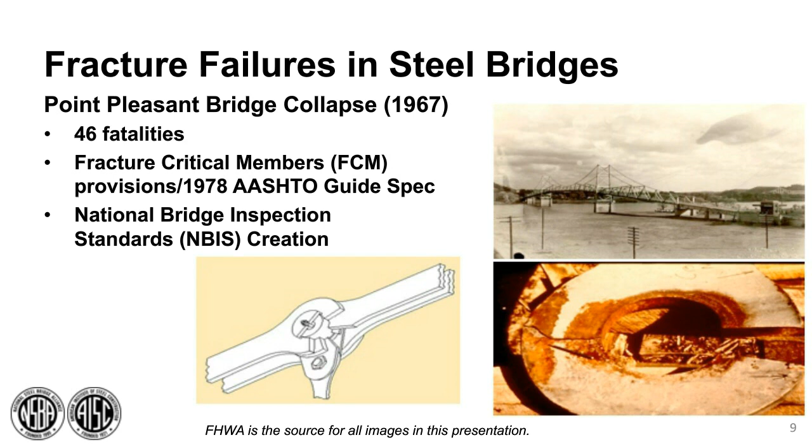Another fracture-induced failure was the Mianus River Bridge collapse in 1983. The two-girder bridge collapsed due to failure of the pin and hanger system in a suspended span. Since then, NBIS added the provision of hands-on inspection.

Hoan Bridge failure was another typical case. All three girders were found fractured due to constraint-induced fracture details. The fracture failure happened without warning, without the indication of fatigue crack growth. The failure happened at a highly constrained detail with high tensile stress and a crack-like condition. There are a number of other fracture failure cases in steel bridges. Fracture control is really necessary.

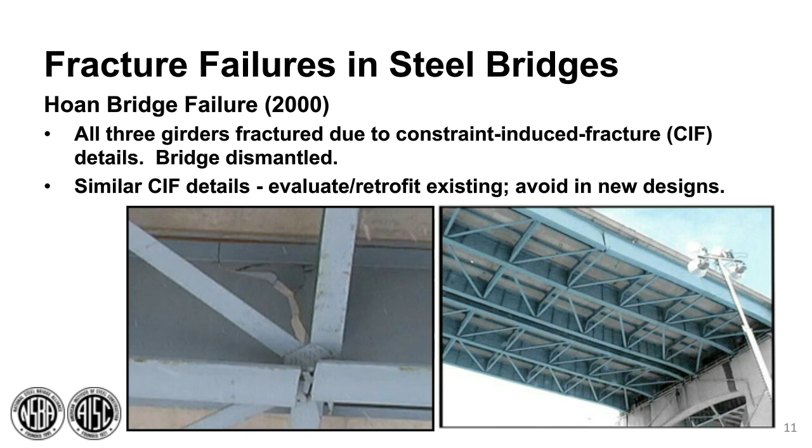The current fracture control practice in the US for steel bridges includes fabrication FCP, fracture control plan, with higher standard of steel toughness and fine grain, and also higher standard of shop fabrication, welding, and inspection. The first version of FCP is the 1978 AASHTO non-redundant FCM guide specifications, and the most current version is the AWS D1.5 Clause 12.

The second leg is the in-service inspection, in-depth and a more frequent hands-on FCM inspection at a 2-year interval. This is per National Bridge Inspection Standard, NBIS.

Beyond this 1 and 2, there is a design consideration beyond those two: contingency, continuity, and composite action. For example, for eyebar suspended spans like the Mianus River Bridge, in addition to more in-depth inspection, many efforts were made to make the span continuous or to add catcher systems at eyebar locations. Make details accessible - for example, we have no new designs using important details inaccessible to inspection, like the Point Pleasant Bridge. In fact, the sister bridge of the Point Pleasant Bridge was quickly dismantled as there is no way to detect similar problems. Also, avoid constraint-induced fracture details in new design. The CIF problem needs to be addressed more than FCP and inspection.

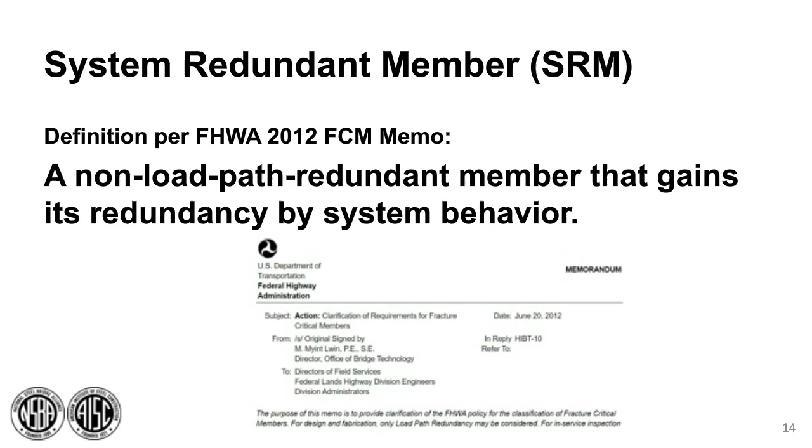Do we need to talk about the system redundancy of a four-girder bridge? No. The bridge has load path redundancy, so don't waste your time here. Per Federal Highway's 2012 FCM memo, SRMs are not FCMs, do not need FCM inspection, as the failure would not cause the bridge to collapse.

Also per that memo, to demonstrate SRMs, a state must submit through the division office of FHWA detailed analysis and evaluation criteria. Once reviewed, these criteria can be employed by the state systematically on their inventory.

I want to mention, if using today's good guidance language, this memo could have used the term 'should' instead of 'must.' However, there's no change to the clearly defined process.

For a type of member without load path redundancy, the SRM determination should follow an FHWA accepted procedure, which may be done in several possible ways: either through analysis, or without analysis by satisfying a list of conditions, or by comparison with previously determined SRMs.

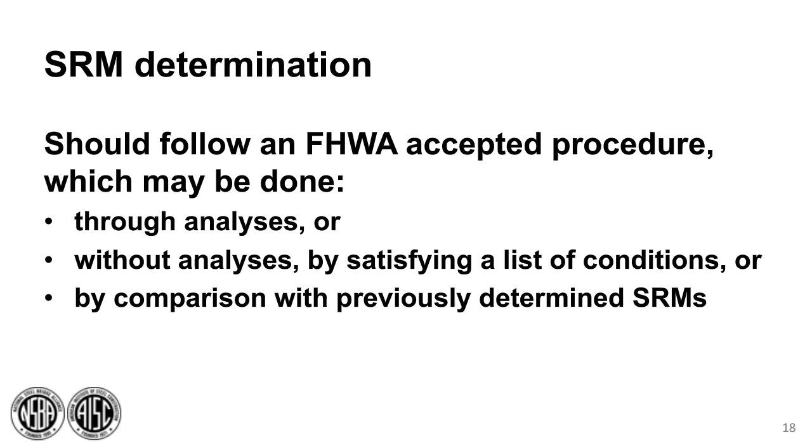I want to mention the procedures acceptable to FHWA. Those include AASHTO SRM guide specifications, which is acceptable to FHWA. This procedure requires forensic refined analysis, or a full 3D nonlinear dynamic finite element analysis, with techniques beyond everyday engineering analysis, such as modeling friction and individual shear studs.

This has been successfully applied at the Wisconsin DOT FC analysis phase 1 and 2, twin tub girder SRMs accepted by FHWA. Later on, Andrew will elaborate on the details of the results.

Procedures based on experimental and analytical research are accepted by FHWA as a second type. This kind of procedure uses linear elastic engineering analysis. The example is TxDOT's engineering criterion and procedure for the evaluation of system redundancy in steel twin tub girder bridges. The procedure was accepted by Federal Highway in November last year.

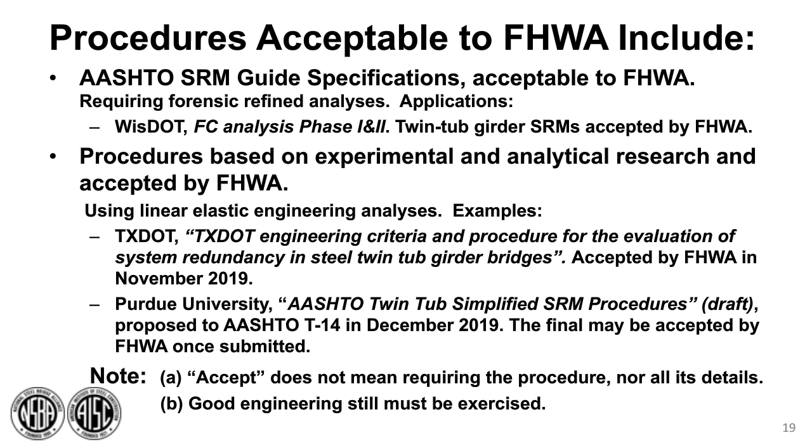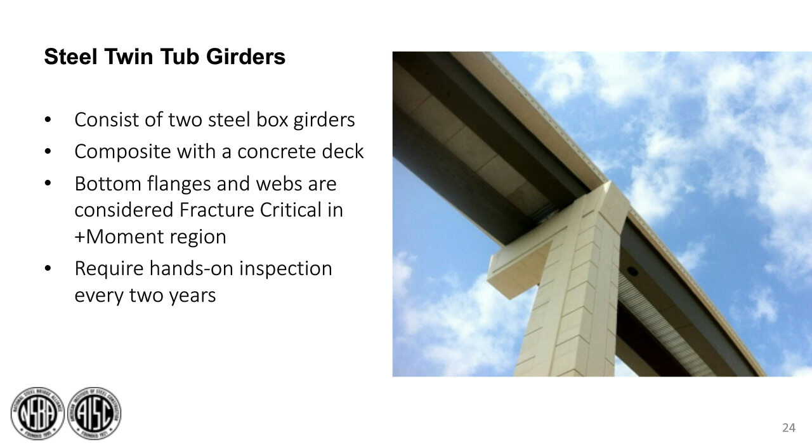Steel twin tub girders are effective for curved ramps and connectors and multi-level interchanges, as shown in this picture. This picture is taken from Google Earth, and it's in Austin, Texas, at IH-35 and US 290.

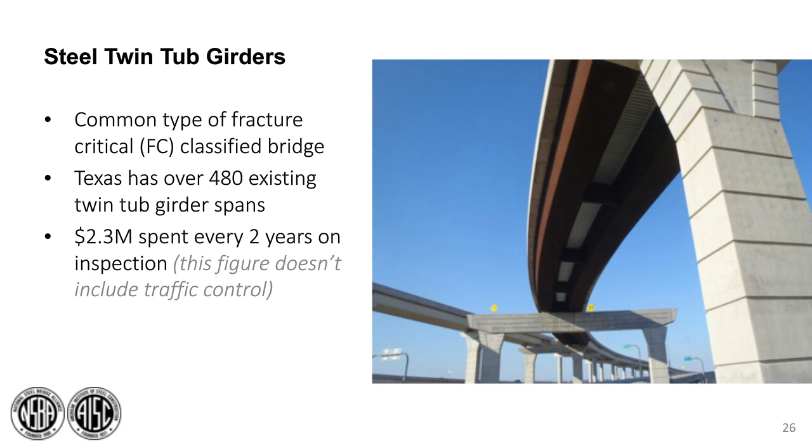Out of all the fracture critical classified bridges in Texas, the steel twin tub girder bridge is one of the most common ones. Texas has over 480 existing twin tub girder spans, and we spend about $2.3 million every 2 years on inspection of these bridges. I do want to point out that that figure doesn't include the costly traffic control that goes into inspecting these bridges.

So now I'm going to move into the research part. In around 2010, a research report was published at the University of Texas at Austin. This was a TxDOT research project looking at the modeling and response of fracture critical steel box girder bridges.

This was a huge research project, and there were several different numbers involved, but 5498 is going to be the main number that you would search for to look for any documents pertaining to this research.

This research characterized the redundancy that exists between twin tub girder bridges. They developed guidelines for modeling behavior in the event of a fracture of the tension flange and the web in tension. The research included laboratory testing, full-scale tests of a twin tub girder bridge, and detailed structural analysis.

This bridge was taken out of service in Houston, and it was hauled to the Ferguson Laboratory in Austin, Texas. This is the bridge used for their full-scale testing, and they tried to mimic TxDOT construction practices when they built a slab and added the rail.

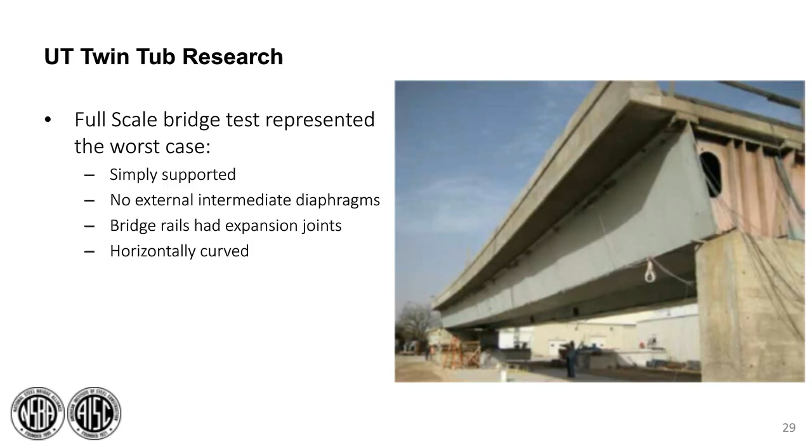Now I'm going to take you through, just briefly, through the test. You could do a whole presentation just on the research, so this is going to be just kind of a really quick snapshot.

For the first test, the researchers simulated a fracture of the bottom flange using a linear shaped charge explosive. This rapidly cut the bottom flange, and then they had an equivalent of an HS-20 truck positioned directly above the fracture at the most severe location.

They did a combination of analytical and full-scale testing on the specimen, and the bridge performed very well. It only deflected less than 1 inch.

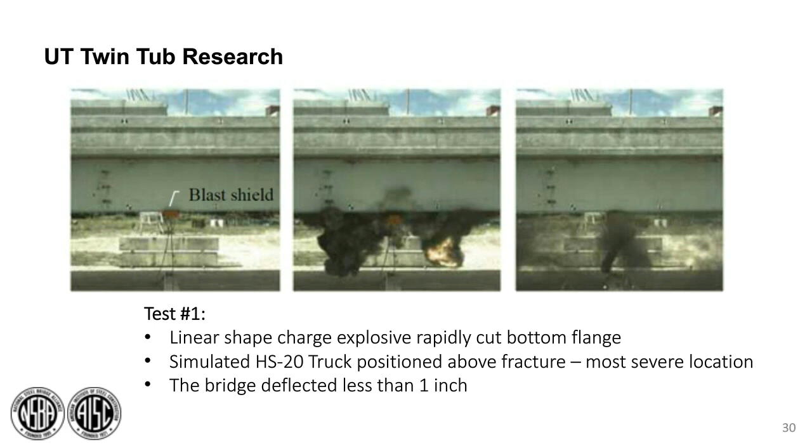For the second test, the bridge was raised back to its original elevation before the first test using scissor jacks. The web was then cut on that same outside girder that the flange was cut, and this provided a full depth fracture.

The loads were induced and applied suddenly by explosive acting on that temporary support system. Same thing as the first test, the bridge performed well. The fractured girder only deflected by 7 inches, and even in its damaged state, this bridge could support traffic and did not collapse.

The third and final test was conducted under statically applied loads, and the bridge was able to carry 363,000 pounds, more than 4 times a legal truckload. So again, this bridge demonstrated that it is system redundant.

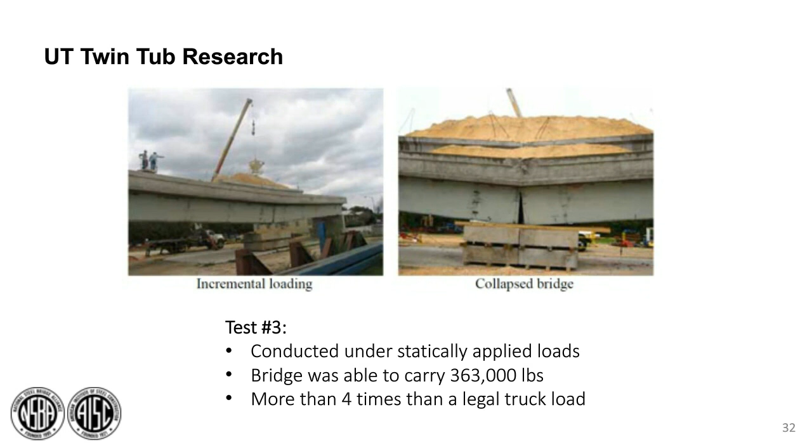I also want to point out that, like what I said before, this bridge was taken out of service, so it was an older bridge. It definitely wasn't designed for system redundancy, but yet it demonstrated system redundancy.

The research highlighted the importance of the deck and the shear connectors and their contribution to the system performance, and they also observed that the barrier railing contributed structurally.

Now I want to talk a little bit about designing for redundancy. I'm not going to go into great detail because Dai just talked about this, but in 2010 the research report was published, and that research was finished.

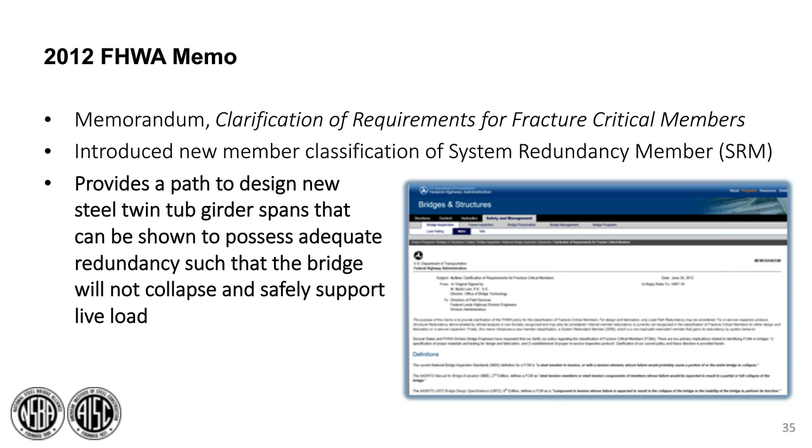Then 2012 comes along and FHWA publishes a memo where they introduce a new classification for SRM. Kind of like what we talked about earlier, this provides a path to design new steel twin tub girder spans that can be shown to possess adequate redundancy such that the bridge will not collapse.

This kind of got TxDOT thinking, what if we can design new twin tub girder bridges to be system redundant? This would eliminate the requirement for the hands-on inspection every 2 years for the life of the structure.

As you know, these inspections often take place at night on direct connectors with a high volume of traffic, and traffic control is costly and could be unsafe for the traveling public because it's a change in traffic patterns.

After that 2012 memo, TxDOT met with FHWA to discuss how we should move forward. The starting point that was proposed was to use the analytical modeling methods from that 5498 research project. That research project developed a simplified method that assumes a full depth fracture of one of the girders.

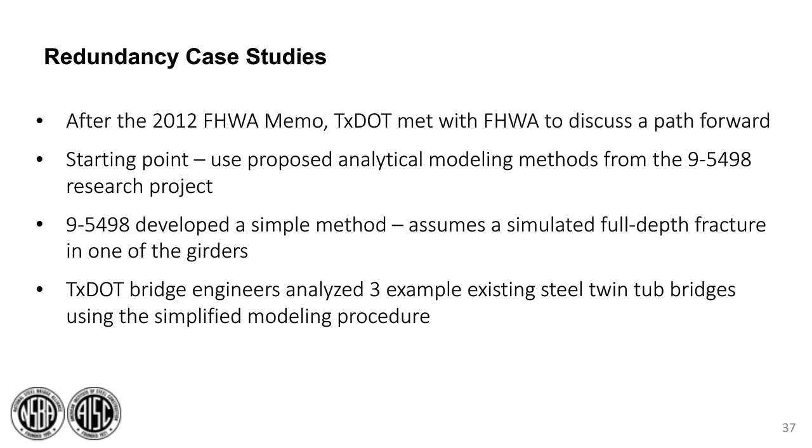TxDOT bridge engineers analyzed 3 example existing steel twin tub girder bridges using that simplified procedure. The 3 case studies represented a typical flyover steel twin tub bridge found in Texas. For example, this was one of the existing bridges that was a case study, a direct connector in Austin, Texas, on US 290 and IH 35.

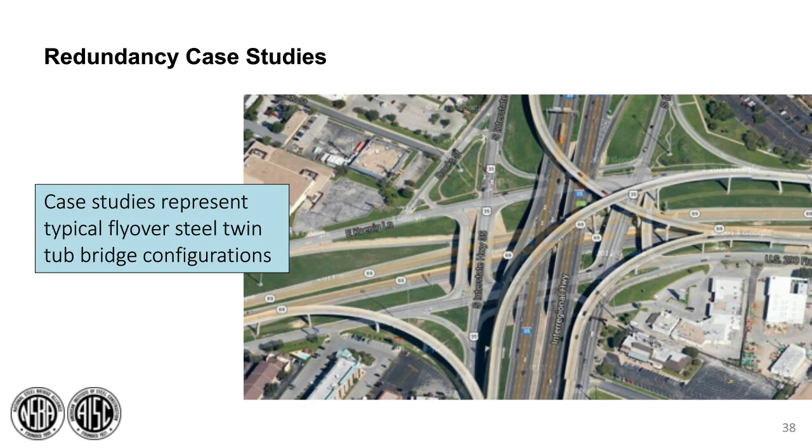The results of the redundancy case study indicated that the intact girders had sufficient bending capacity as well as adequate deck shear strength and shear stud tensile capacity. But in all cases, the intact girder failed in combined torsion and shear at the supports, though that margin of inadequacy was small.

Compared to that 5498 experimental bridge, which had a span length of 120 feet, the 3 case studies had longer span lengths. They had a sharper horizontal curvature, which led to a greater dead load, a larger eccentricity, and therefore a higher torsion and shear at the support location.

So all 3 cases didn't pass that simplified method criteria. That was just at the support girder section shear capacity check due to that torque and shear forces. But none of the cases failed due to lack of shear stud tensile capacity.

This led TxDOT to believe that new steel twin tub girder bridges could be designed and detailed for system redundancy, so that they wouldn't be considered fracture critical and could safely carry live load without collapsing.

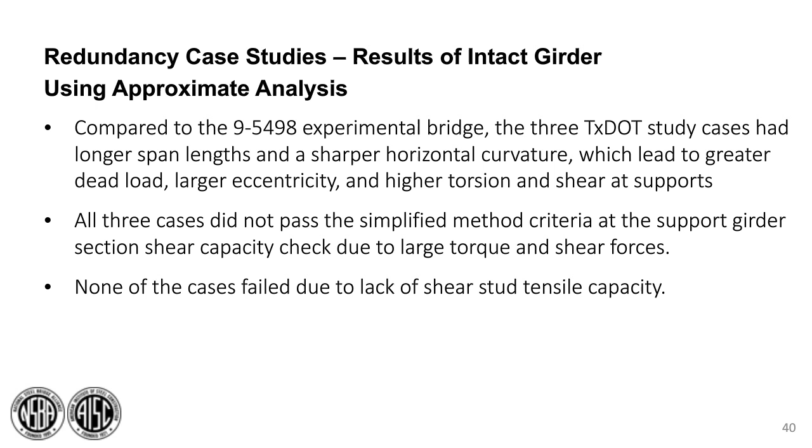That brings us to 2016. In 2016, TxDOT instituted a twin tub task group. The task group membership reflected the overall structure of the Texas Steel Quality Council, with 17 members participating. If you don't know, the Texas Steel Quality Council was originally established in 1995.

It's a joint owner industry forum. It's made up of TxDOT inspectors, designers, fabricators, erection engineers, consultant engineers, FHWA, academics, detailers, trade association representatives, and steel mill representatives. So basically, anyone in Texas involved in steel or steel bridges.

The goal of the task group was to develop LRFD-based design specifications that would govern the analysis and design of non-fracture critical steel twin tubs.

So an AASHTO ballot item was developed and presented at several industry and AASHTO meetings. But in the end, AASHTO was not ready to put the language in the specifications specifically for twin tub girder bridges. At that point, TxDOT was encouraged by FHWA to submit for approval as a state.

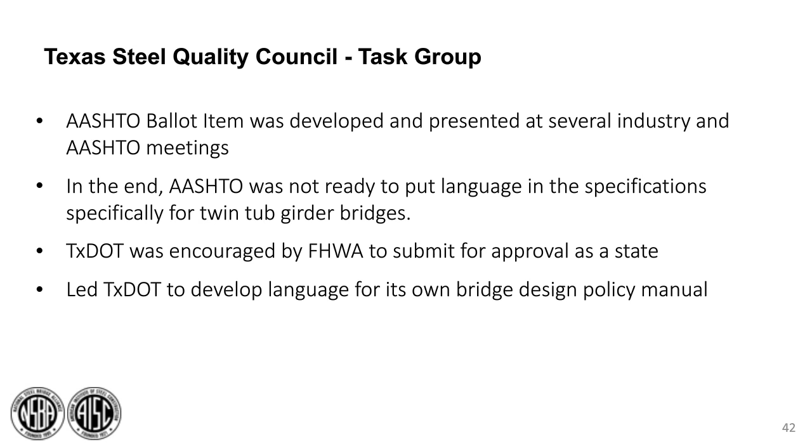In 2020, earlier this year, we published a new revised bridge design manual. Within that manual, we present a methodology where you can design spans, or twin tub girder spans, so that they will not collapse after you fracture one of the girders.

To complete this design methodology: number one, you would first just design your bridge like you normally would, using a couple of limit states with a couple of exceptions. You design for your strength limit state using a redundancy factor of 1.05. You design for service limit state, and then you would design for infinite fatigue life for that fatigue and fracture limit state. Then, the next step, you would design your bridge for member failure, which I'll talk about a bit.

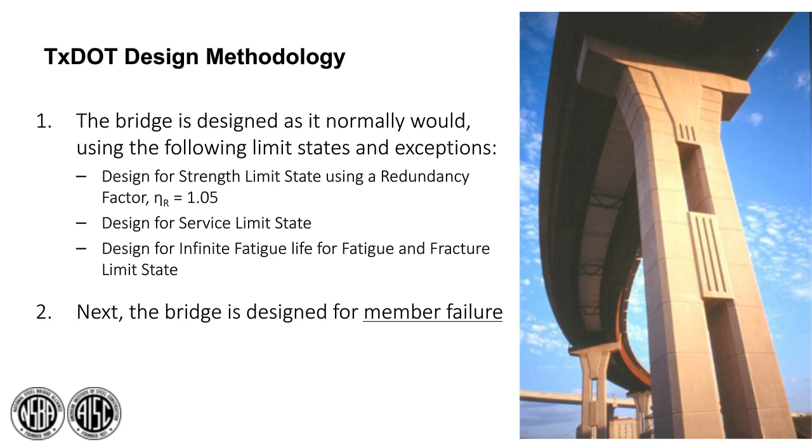Now I want to talk about how you would determine which girder to fracture and where to fracture the girder using the TxDOT method.

The bottom flange in tension and the webs attached to that flange of the critical girder are assumed to be fully fractured at the location of the max factored tensile stress in the bottom flange, determined using the Strength 1 load combination.

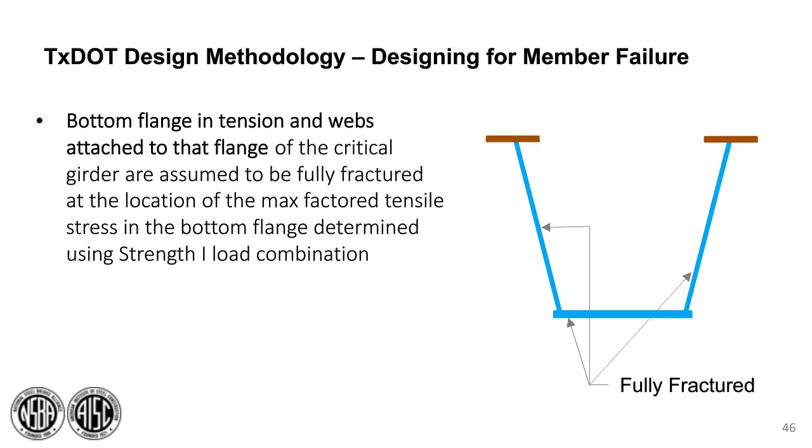To result in the worst case loading scenario, the assumed fractured girder is chosen based on its position in the cross section relative to the traffic lanes and its eccentricity to the deck and railing. The methodology also points the designer to check simple spans and end spans of continuous units as the most conservative cases. If a span is horizontally curved, the girder with the largest radius is assumed to be the fractured girder.

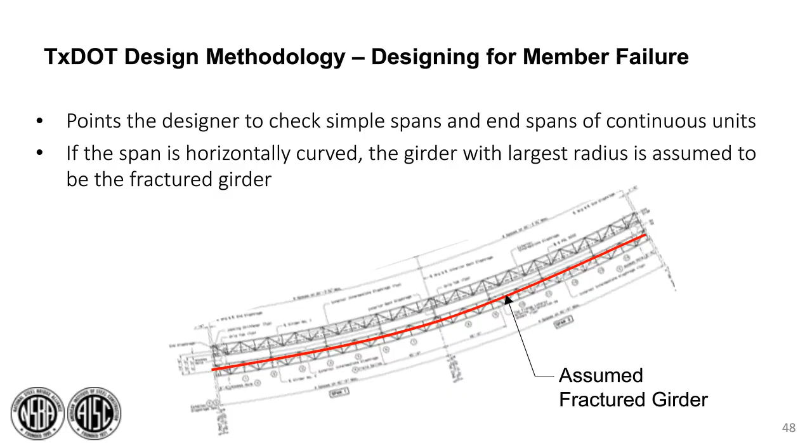So the decision to use the probability of such a fracture for tub girders designed for infinite fatigue life is considered exceedingly small in comparison to the bridge's design life.

So the TxDOT method addresses the design of a simulated fracture with the extreme event limit state. TxDOT revised the AASHTO definition of the extreme event limit state to include structural member or component failure. This decision to use the extreme event was also based on precedents that have previously been set.

For example, the Alternate Path Analysis and Design Guidelines for Progressive Collapse, published by the General Services Administration for buildings, uses an extreme event. The FHWA guidelines for cable stayed and arch bridges uses an extreme event. The Pennsylvania DOT design manual uses an extreme event for the failure of a component without the collapse of the structure, and that has been in their manual since the mid-90s, we've been told.

So this gives you a look at how we address this. We revised the table to show an Extreme Event 3, and this would be for components, or for that system redundancy for the twin tub girders. Basically we would supplement the AASHTO tables in Chapter 3.

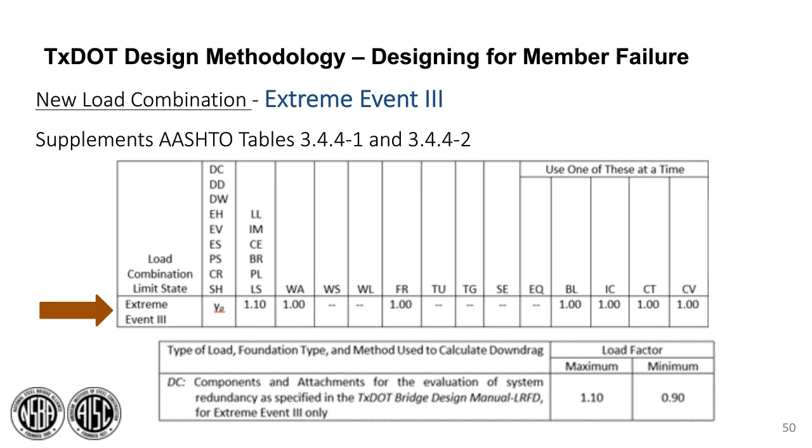So a little bit about live load. The live load for this design methodology includes both the truck and the lane. That truck is positioned on the bridge directly above the presumed fracture location, just to get the worst effect. The number and the width of design lanes equals the actual number and width of the striped lanes on the bridge.

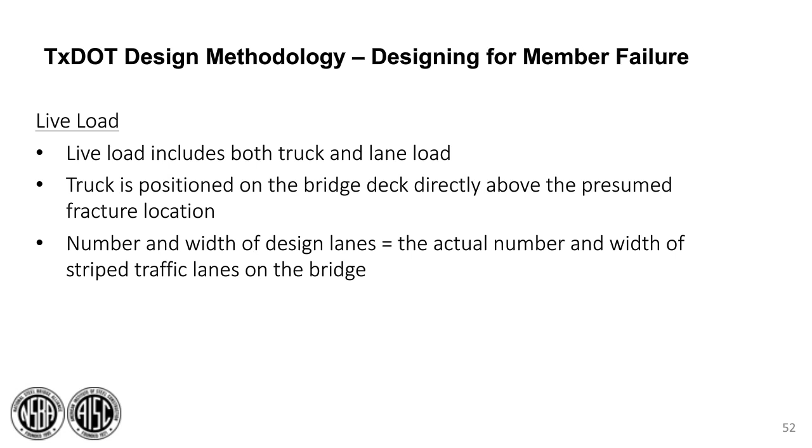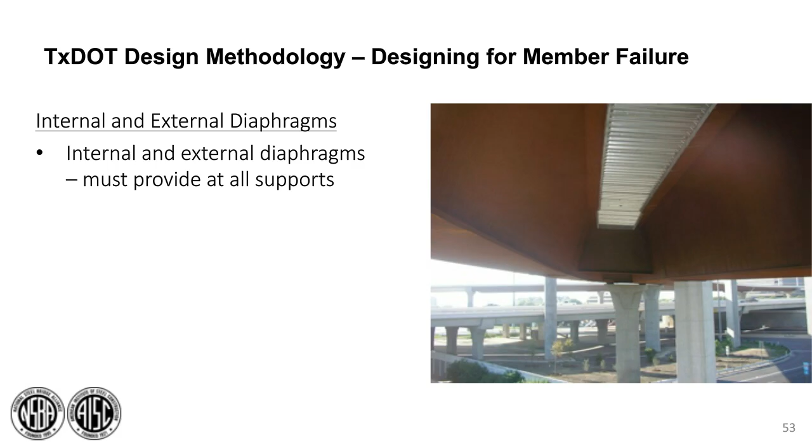The design engineer must also provide internal and external diaphragms at all supports. The diaphragms and connections must be designed to resist the torsional moment in the assumed intact girder. They also must be designed to transmit vertical and lateral forces to the bearings during and after the assumed fracture event, and to act compositely with the slab via the shear connectors.

At least two permanent external and intermediate diaphragms must be provided at each side of the location of that max factored tensile stress in the bottom flange. Those intermediate diaphragms should be at a certain distance, which we give in our manual, to enhance system redundancy by providing additional load paths on each side of that assumed fracture location.

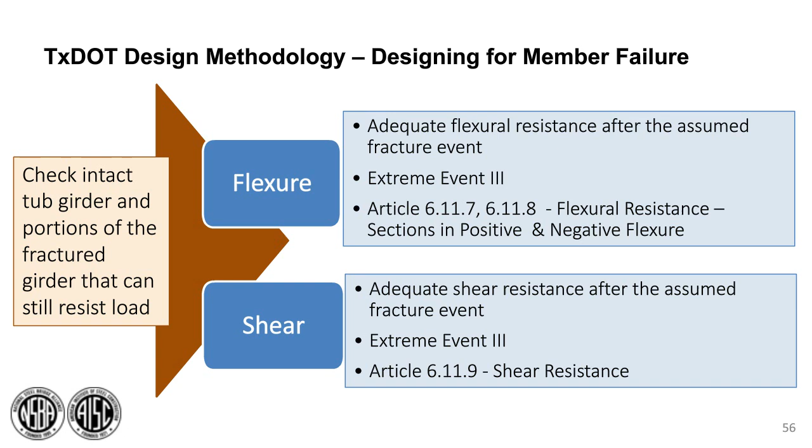Next, you also want to check for shear for the concrete deck, the end diaphragm, the shear connectors, and the top flange lateral bracing.

For the concrete deck, you need to check adequate shear resistance to resist shear due to torsion after the assumed fracture event. You would use Extreme Event 3, and the provisions according to Article 5.7.3.3. And if you want to use the TxDOT design methodology, the empirical deck design is not allowed.

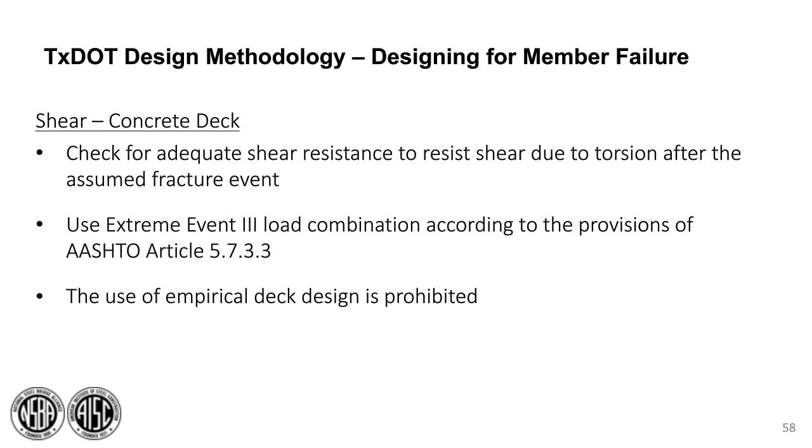You also want to check the end diaphragms and their connection to both tub girders, to ensure adequate shear resistance to the torque applied to the intact girder after the fracture event. You would also use the Extreme Event 3 load combination.

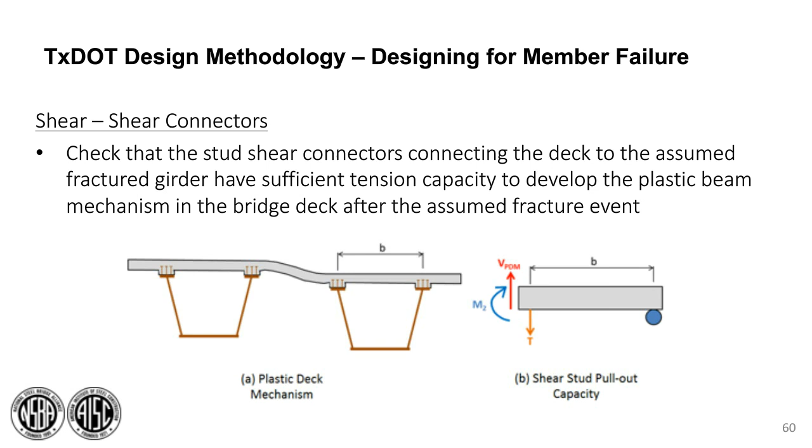You want to check the shear stud connectors connecting the deck to the assumed fractured girder, to have sufficient tension capacity to develop a plastic beam mechanism in the bridge deck after the assumed fracture event. You can design the shear connectors on all the support diaphragms for combined shear and axial force according to the provisions of Article 6.16, or you can use the analysis presented in the 5498 research.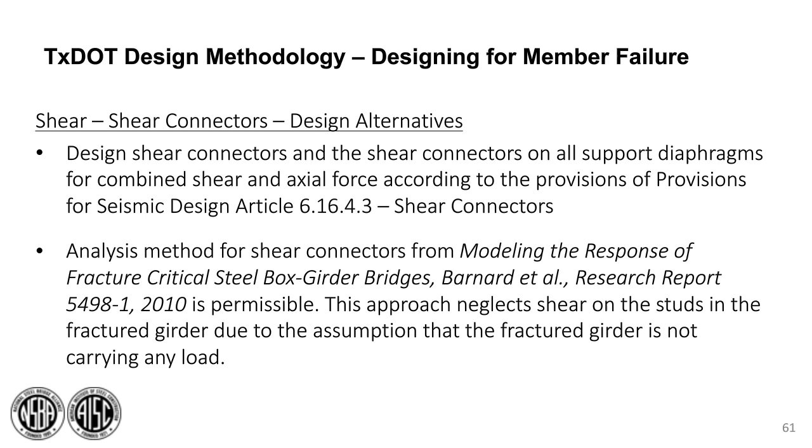Just a little bit about detailing. You would detail the shear connectors to extend above the bottom mat of deck reinforcement.

And then the top flange lateral bracing can be considered part of the resisting section for St. Venant torsional shears in addition to the concrete deck. And the contributions of the deck and the top lateral bracing are additive.

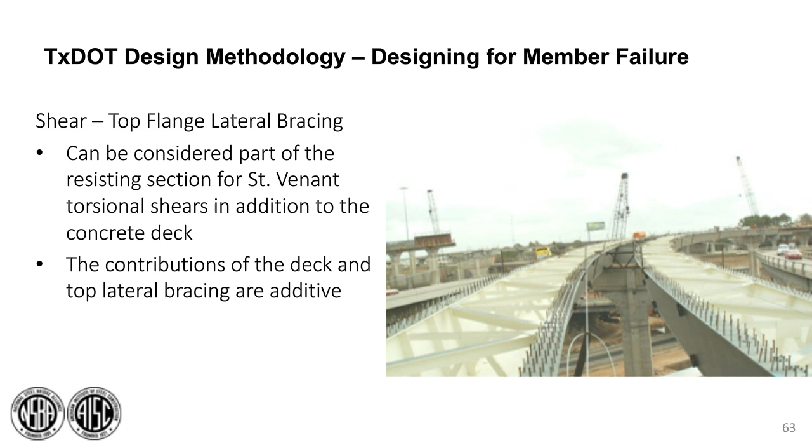So one of the most accurate ways to assess system redundancy of complex systems like twin tub girder systems is through finite element modeling. But such models require a substantial amount of time to develop and analyze. And so there are two different types of analysis that can be used to evaluate extreme event 3: an approximate structural analysis that was developed from the research, 5498, or a refined structural analysis. And I'm just going to touch very briefly on these two.

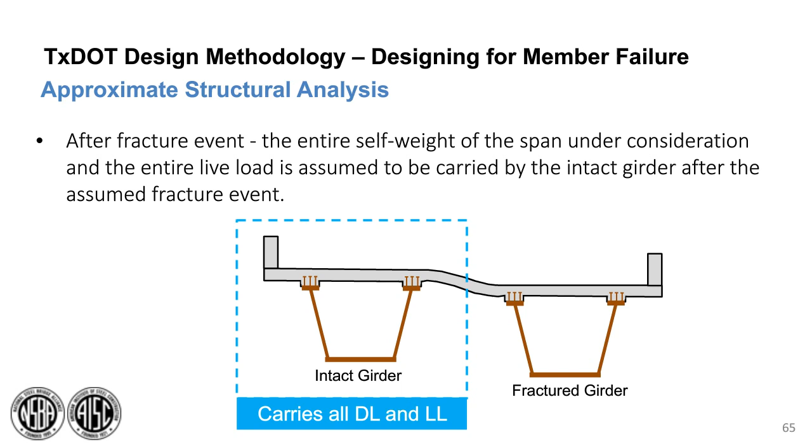So a little bit about the approximate structural analysis. The entire self-weight of the span under consideration and the entire live load is assumed to be carried by the intact girder after the assumed fracture event. So it's very conservative. And you can use this method if your spans don't exceed 250 feet, if your supports are skewed no more than 20 degrees, you have a horizontal curvature greater than 700 feet, and then, of course, if the engineer ascertains that the use of the approximate analysis is adequate.

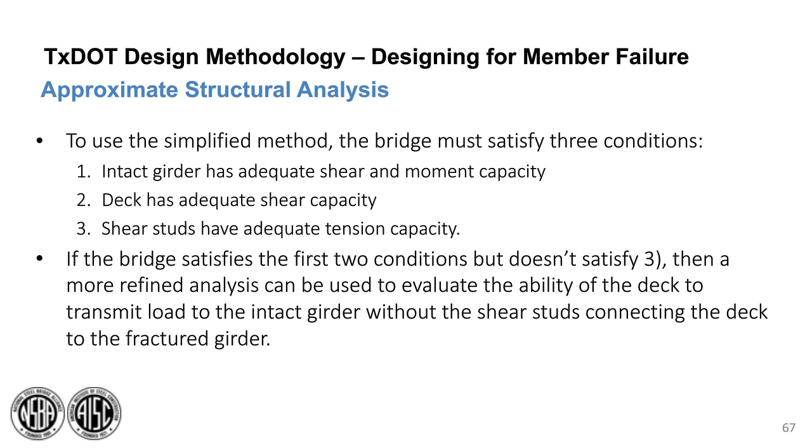So to use the simplified method, the bridge must satisfy 3 conditions. The first is the intact girder has to have adequate shear moment capacity. The deck has to have adequate shear capacity, and the shear studs have to have adequate tension capacity. And so if your bridge satisfies the first 2, but doesn't satisfy number 3, then a more refined analysis can be used to evaluate the ability of the deck to transmit the load to the intact girder without the shear studs connecting the deck to the fractured girder.

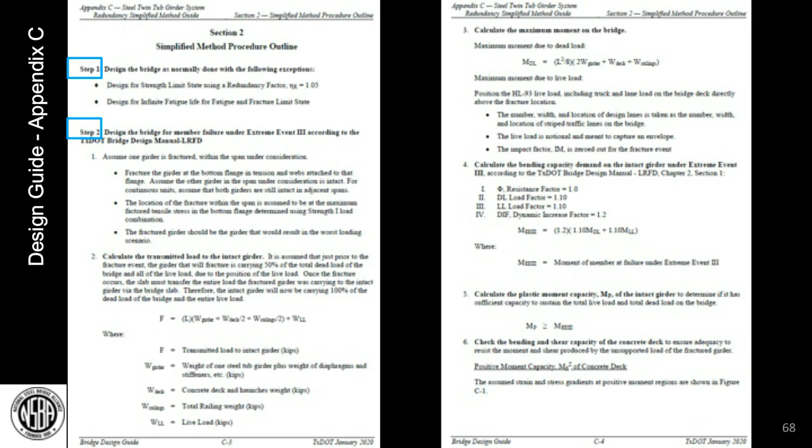So the TxDOT Design Guide in Appendix C has a step-by-step procedure that outlines a simplified procedure. And I'm not going to go over all of this. I just wanted to give the viewers out there a little snapshot of what is available. And I've highlighted step 1 and step 2. Step 1 is design the bridge as you normally would. Step 2, design the bridge for member failure. The guide is about 17 pages in all, the Appendix C guide. And so I definitely encourage you, if you're interested, to take a look at that, and I'll give you the web link in a minute for that.

So here's just some more pages from the guide. This is checking bending and shear capacity of the concrete deck. Here's another 2 pages, just skipping ahead. And this is checking the behavior of the shear studs. And as you can also see, there are graphics that help tell the story and help you to visualize exactly what the steps involve.

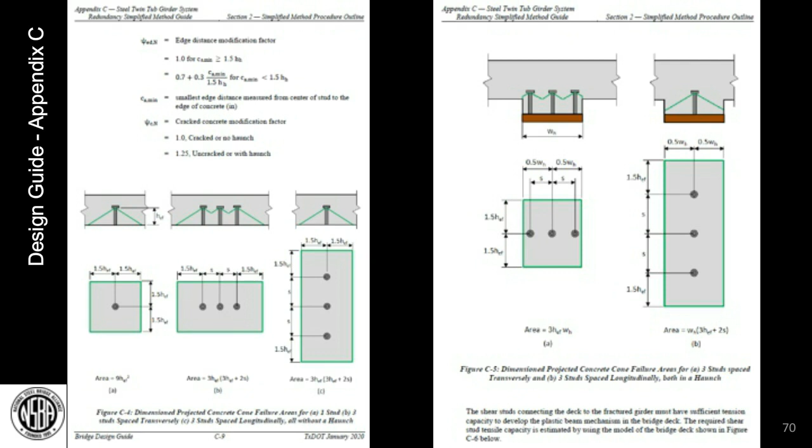So next, a little bit about the option for refined structural analysis. This accounts for the capacity of the intact girder as well as portions of that fractured girder that can still provide some structural resistance. And that was seen in the research. So that is definitely what is happening. The load distribution between the intact girder and the fractured girder can be realistically modeled this way. So for the refined structural analysis, it's modeled with that approach from 5498, the research. You would use nonlinear material properties. The girders would be modeled as shell elements. The deck is modeled as a solid element, and the deck reinforcing would be modeled as a 2-node truss element.

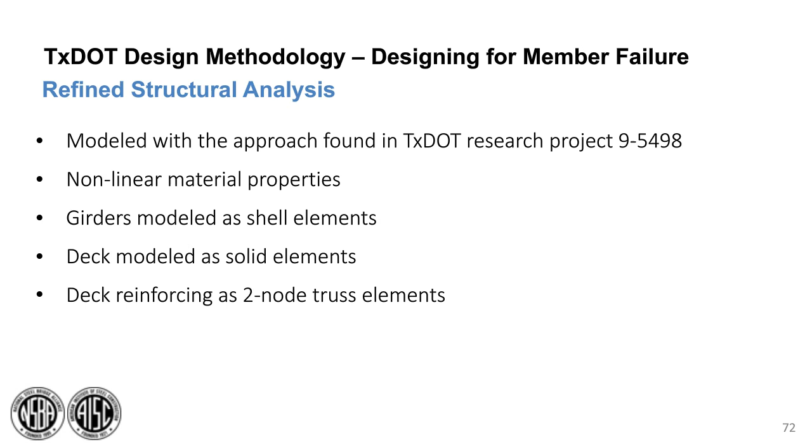So if you'd like more information about this, we have a policy manual, which is our bridge design manual. In Chapter 3, Section 17 is a twin tub policy. And then along with that, we also have a guide, and the guide is more commentary that supports our policy manual. And so those are the links, and those should take you right to the manual and the design guide.

So moving on to FHWA approval and exactly what that took from the Texas perspective. That 2012 memo allowed owners like Texas to demonstrate that a structure had adequate redundancy, and be classified as system redundant. But under that memo, owners must submit each bridge for approval. So if you started going through your inventory and you needed to have them deemed system redundant, you would need to submit each one. And that's still the policy now.

But TxDOT's goal was to be automatically approved by FHWA if the bridge was designed using our TxDOT SRM methodology for twin tub girder bridges. So we decided to tackle the twin tub girder bridges because it's a bridge found in Texas. And so that was our goal, and that was the whole reasoning behind this. And so then those bridges could be SRM, they wouldn't be fracture critical, and they wouldn't require that 2-year hands-on inspection.

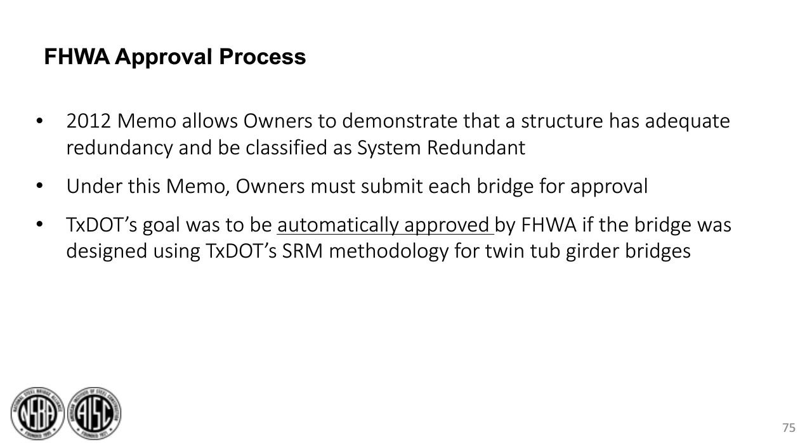So here's a little timeline of our FHWA approval process. In May of 2018, we submitted our TxDOT Bridge Design Manual language for that SRM method for twin tubs to our local Texas FHWA bridge engineer. And then he submitted it to the FHWA headquarters in Washington, D.C. After that, there was a lot of back and forth email correspondence between TxDOT and FHWA headquarters.

Within this time frame, we created that Appendix C that I just talked about, and that was included and sent to FHWA. Then in November 2019, TxDOT received approval for our method, which was definitely exciting. Now I want to touch on these two big arrows, the back and forth correspondence and the guide, because May 2018 to November 2019 is a big gap, and a lot happened in that time frame.

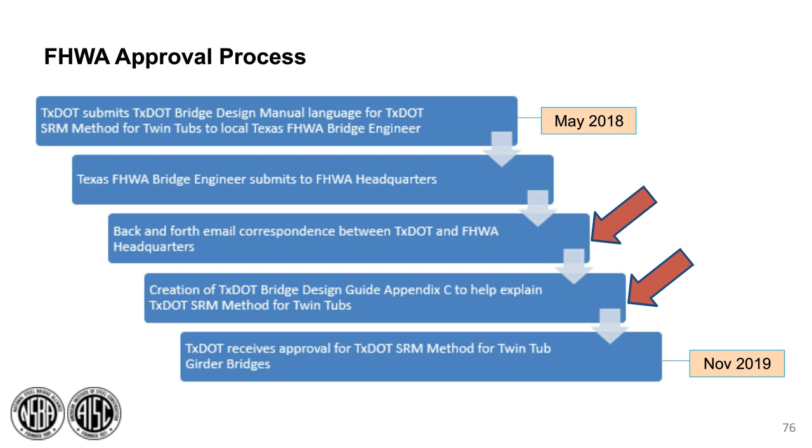This process definitely made our manual better. It made our guidance more clear because we felt if FHWA was asking questions, there's going to be other engineers out there asking questions too. So this process made everything we did better. It clarified things, and it also made us go back and say, okay, why is that? And then we would find it and send it back. So it was a very good, very positive experience, I would say.

The next thing I want to hit on is this bridge design guide. I wanted to bring this up because it really helped spell out our simplified method. It made it more clear and provided a procedure that outlined each step. I think this really helped FHWA see exactly what we were doing, because when we first submitted our process, we didn't have this. Giving them this, with actual equations and actual pictures, really helped. This was submitted in the fall of 2019, and we got acceptance in November of 2019.

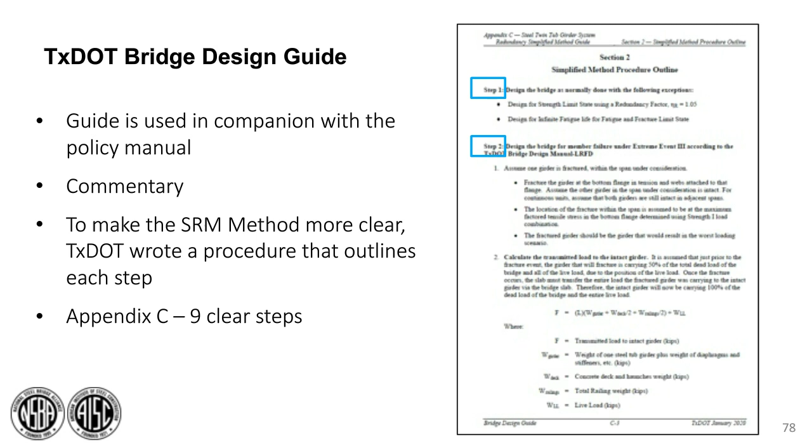I also want to say that the key to our success was collaboration, extensive collaboration. It started with the research, we had the case studies, and then huge collaboration with the Texas Steel Quality Council. We collaborated with AASHTO T14 and some of the people that helped support that committee, and of course FHWA was a huge collaboration with them. I definitely feel that collaboration was the key to our success.

So moving forward, our future twin tub spans will be designed using this TxDOT methodology. This is in our bridge design manual, it is required, this is our policy now, and these bridges will be classified as SRM moving forward, all the new ones.

We're currently developing in-house spreadsheet tools to allow for this simplified method, which is kind of the beauty of it, you can create spreadsheets for this. We are also developing prototype refined models to provide guidance for future redundancy evaluations. We have a future goal to also look at all of our existing twin tub girder spans and evaluate those for redundancy. We're also looking at a different steel component, the steel box straddle caps, which are fracture critical. We have a research project going on right now at the University of Texas looking at this bridge component.

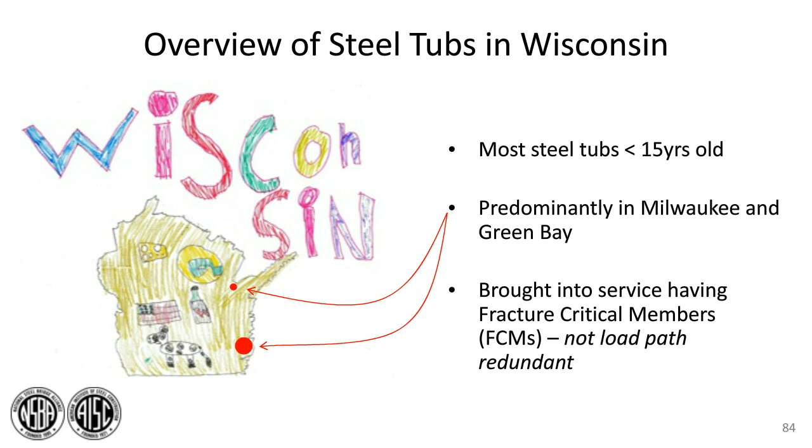One thing I want to point out that's common to our tub designs here in Wisconsin are these external diaphragms. These are full depth, solid plate steel, composite with the deck, and generally located about a third span. Since they're composite with the deck, these are permanent. I know there's sometimes a tendency to take these out for aesthetic reasons, but they're left in place here in Wisconsin.

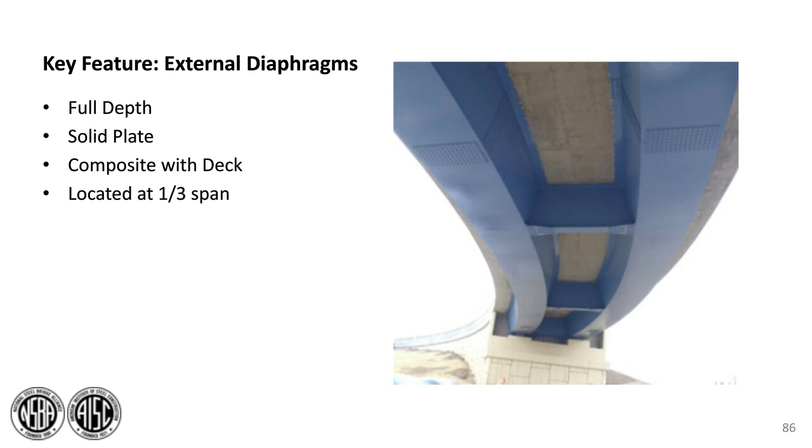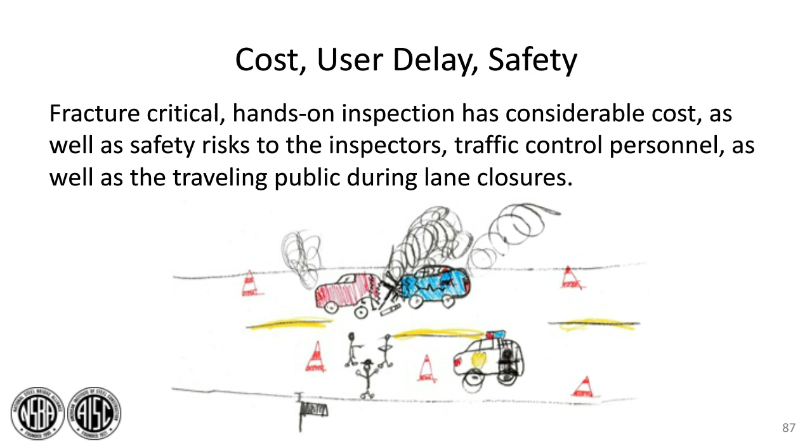Fracture critical inspection, if you're familiar with it, can be costly. There's user delay and issues of safety. Because of the nature of fracture critical inspections being hands-on, it costs a fair amount, and there's also traffic control, which puts the traveling public at risk and puts our inspectors at risk. So if there's a way we can avoid doing it or lessen doing it, that's something we definitely want to look into.

Just to talk a little about the resources required for doing a fracture critical inspection - generally for a bridge you're looking at 10 to 24 hours, spread over a few days and nights. This depends on the size of the structure and how many people we have available. You have to have special access equipment - we call them snooper trucks - to give access to the underside of the girders. If we're running two of them, it's at least 4 operators and could be up to 6 inspectors. On top of that, we're talking about county staff doing traffic control and law enforcement. So it's quite a big thing to get these done.

So, cost. Every 2 years, fracture critical inspection is required every biennium, so that's somewhere around $36,000 to $66,000 per bridge, depending on if we have our own staff able to do it or if we have consultants hired out. We're looking at roughly $1 million every 2 years to complete these inspections for roughly about 17 bridges that I'm talking about today, and that does include traffic control cost.

Here's a picture of that snooper truck I was talking about, with the inspectors in the bucket underneath the bridge. Note the lane closures in both directions of traffic. For the safety of the inspectors, we close the lane where they're inspecting, and then we have to shift traffic over into the other lane so they can continue with their inspections. So it can be a logistical challenge at times.

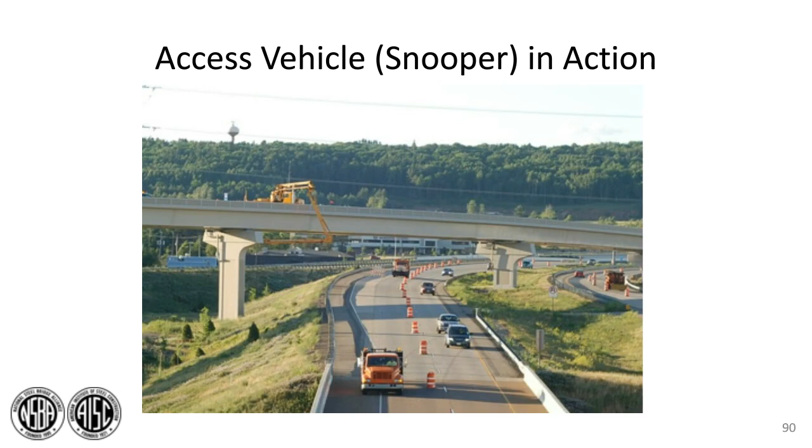As I mentioned, a lot of the tubs are in metropolitan areas, so daytime closures can be a bit unpractical, unless of course you're dealing with a pandemic - maybe traffic's a little lighter. But generally inspecting at night, arguably the quality can go down a bit when you're working just with headlamps in this kind of situation. And sometimes, getting traffic control is challenging enough, but if you have to work with perhaps a railroad or some other entity to get below the girders, that offers another layer of challenges to inspection.

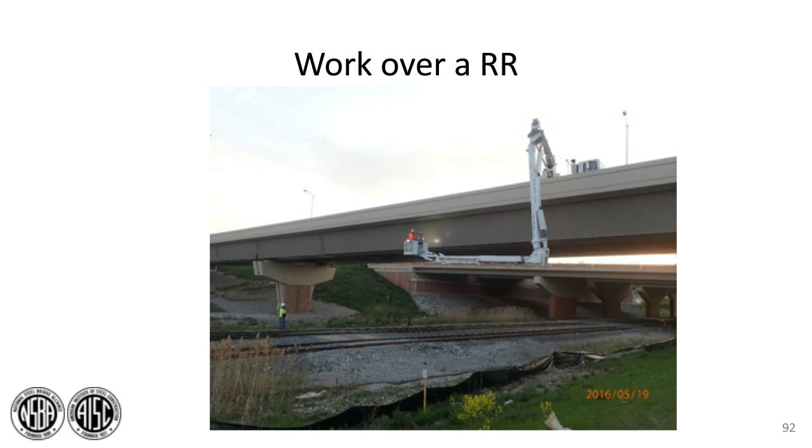So Dai and Jamie touched on this already, so I'll try to be brief. Basically, in 2012, this idea of an SRM came about, where a member that's fracture critical, because it wasn't considered load path redundant, could still be considered redundant from a system redundancy standpoint if you could show that through refined analysis.

So what does it get you? Well, it gets relief from that fracture critical hands-on inspection. Now you still have to follow a fracture control plan when they're being fabricated, but the in-service inspection becomes much easier over the life of the structure.

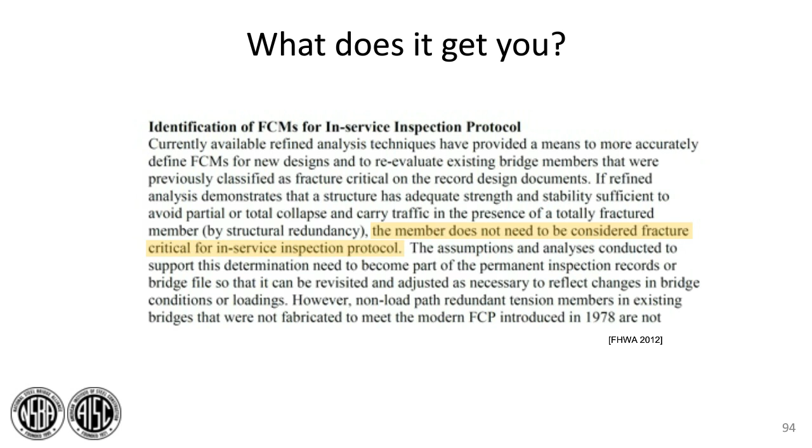So how do you go about it? As of 2012, when the memo came out, it mentioned that there wasn't really anything codified in terms of guidance on how you're supposed to do this analysis.

Since then, one important project was NCHRP Project 12-87A, conducted by Dr. Connor at Purdue University, which culminated in NCHRP Report 883, Fracture Critical System Analysis for Steel Bridges. That fed into the later AASHTO guide specification for analysis and identification of fracture critical members and system redundant members, which came out in 2018. These are two really important documents for guidance on setting up an analysis. Lastly, the memo states that whatever you're proposing needs to be submitted through FHWA for approval.

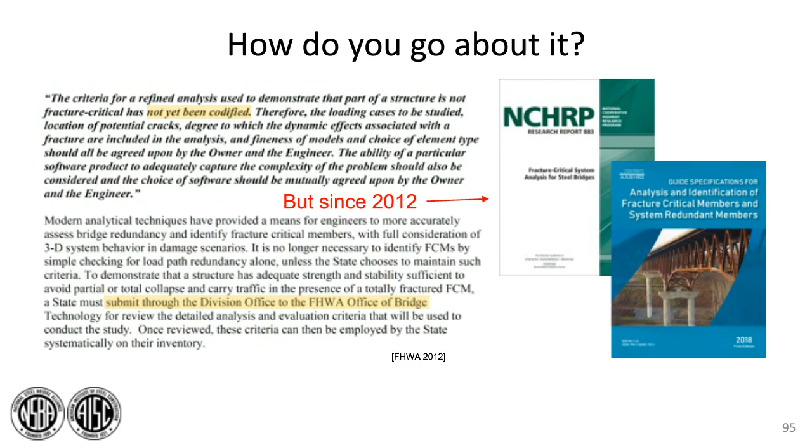So the next few slides, I'll talk about the evaluation that went into steel tubs in Wisconsin. I want to note that NCHRP Report 883 talked about redundancy as it applied to multiple structure types. So today this is an example of how that methodology was applied to a specific type of structure, namely twin tub girders.

That is the basis for the evaluation done on WisDOT. We worked again with Dr. Connor at the S-BRITE Center at Purdue to do the evaluations, mainly for his involvement in the NCHRP project, and because this method relies heavily on nonlinear detailed 3D finite element modeling, which is not generally in the toolbox of DOTs.

The efforts of that modeling were benchmarked to the full-scale testing at the University of Texas, Austin that Jamie had mentioned earlier.

So I'll go over the modeling. As you can see, it's a pretty detailed model. Shell elements were used for the deck, and the reinforcement was part of those shell sections, kind of like a layered shell. The parapets were included as solid elements. Internal and lateral bracing were Timoshenko beam elements with connector elements representing the stiffness of that connection, and the shear studs were also modeled as connector elements. Those properties were based on parametric study and calibration to full-scale testing.

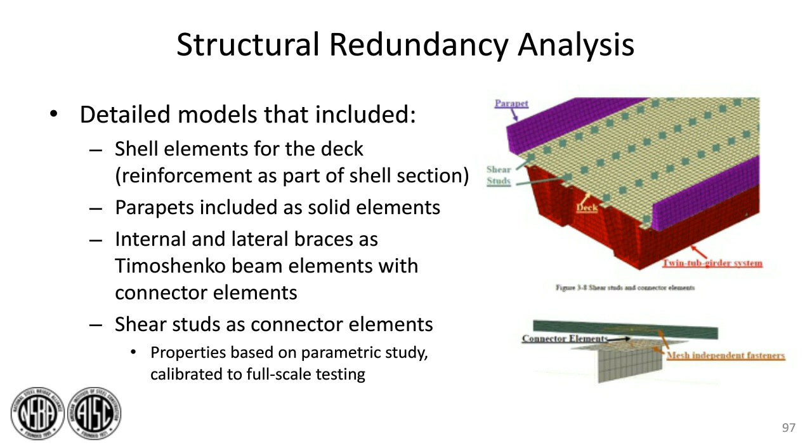Once you have the model set up, obviously you're looking to load the bridge somehow. So as part of 883, two loading combinations were developed, Redundancy 1 and Redundancy 2. Redundancy 1 was intended to describe the loading condition at the instant of fracture, and if you look at that top equation, you see there's a dynamic amplification factor in there.

For the tubs that Purdue evaluated, this was generally around 20%, a little less than that, of the static load, so 0.2 was used here. And if you note the live load factor leading into that, it's 0.85. So you might consider that somewhat analogous to an extreme load condition where you're assuming the event is occurring under normal traffic conditions, hence the less-than-1 factor there.

And so then under normal traffic conditions, the loading would be per the striped lanes on the bridge. Redundancy 2 describes the loading that would occur after the fracture happened but before it was detected. With that, the load factors go up, approaching more of an operating level, and you'd be considering all design lanes loaded. That's generally what controlled the evaluation, as we found.

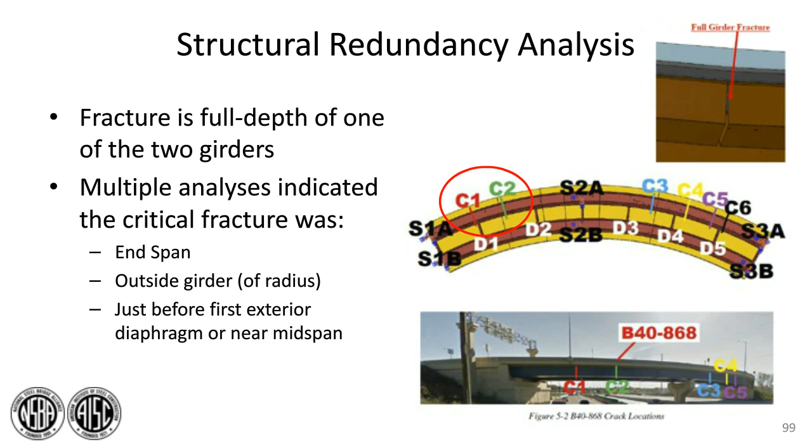So once you have that all set up, you have to set up the criteria for determining yes, it's redundant, or no, it's not. We had a number of serviceability checks - I didn't put them on here, but things like the bearing, obviously the girder can't slide off the bearing, that kind of thing.

But what you see here is more like strength requirements. So the average strain had to be less than the minimum of 5 times the yield strain, or 0.01. And the goal of this was just to limit redistribution of forces in the faulted state.

Max strain had to be less than 0.05, and this is kind of conservatively selected. If you look at the typical stress-strain diagrams of typical bridge steel, that 0.05 is still on the ascending curve, so there's some extra

load carrying in there, if you will. And then obviously we're not interested in anything buckling, right? So the compressive stress needs to be less than the buckling stress. And this, just as an FYI, in the modeling that was done, because the finite element was so refined, this wasn't an explicit check because the model captured buckling modes.

And then 15% reserve margin. So basically, the loading would be ran up an extra 15% just to verify that we weren't right at the cusp of failure. So that helped build in some conservancy to this criteria.

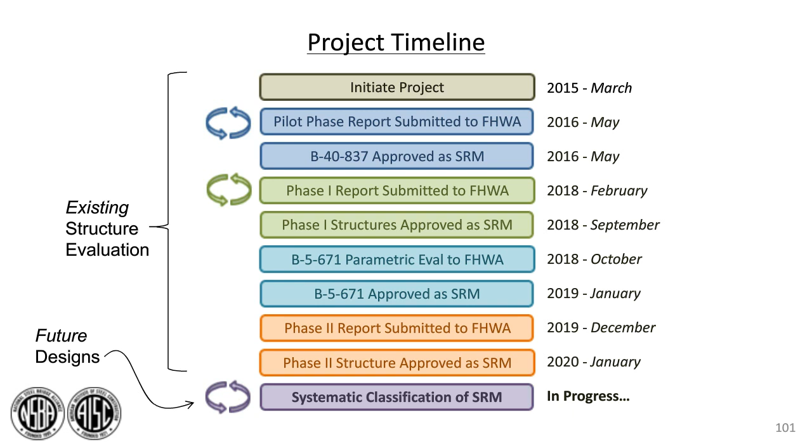Just talking about that pilot analysis - bridge in Milwaukee, this one was kind of a tight radius bridge, 2 spans. It was funded by NSBA and WISDOT. And as I mentioned, this one was analyzed based on what was being developed as part of NCHRP Project 12-87A. Report 883 hadn't come out yet, but much of that information was already in the works.

So through those criteria that were being developed, that structure was determined to be redundant. We submitted it to FHWA, and it was approved for reclassification in 2016.

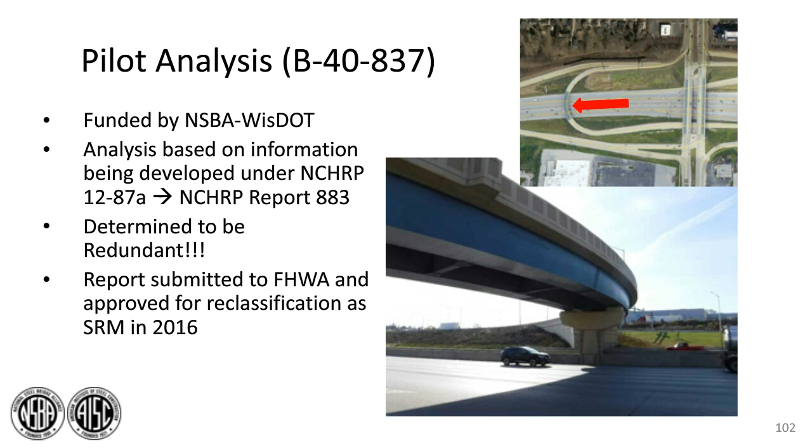So just to detail what it was we submitted to FHWA during this phase - everything I talked about prior in terms of the modeling assumptions, how we would load the bridge, where it was fractured, the criteria that we were benchmarking to say whether or not it was redundant, all that was detailed in a report, and then obviously the results of that structure going through that evaluation process.

And just to speak to it, FHWA is very supportive of this type of evaluation, looking at getting these structures off the fracture critical list if it's deemed reasonable. They provided quality review and feedback in a timely manner, so it was a positive experience working with them to get this structure reclassified.

So as I mentioned, once we kind of worked out all the details of what the evaluation would look like, we entered phase 1, and we had 12 extra bridges that we were having Purdue analyze. These bridges represented a wide spectrum of geometry and layouts - we had some that were tight radius, and then we also had some really long multi-unit overpass type structures.

The cross-section shown on the bottom there isn't an actual structure, but just represents the ranges of structures that we were looking at.

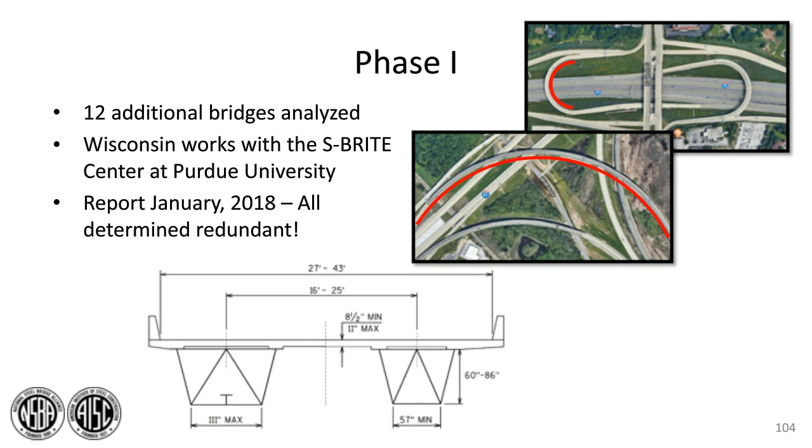This was a little PR blurb that we submitted after successfully having 13 of these reclassified, really just trying to buck this idea that fracture critical bridges are inherently unsafe, when in fact what we've done here is presented information that builds confidence that these structures are safe and have plenty of capacity, even given one of the girders fracturing.

And in doing so, we've saved taxpayers money and we've also improved the safety of the traveling public and inspectors. And those resources can now be used elsewhere.

So this was kind of a little break we took from the refined analysis aspect of it, and we started developing sort of a sandbox of everything that had been evaluated up to this point, defining the limits such that if a bridge fit within those limits, it would also achieve SRM classification without the need for FEA.

And so that's what we've done here. Some of the criteria we worked off of: it had to be designed LRFD, had to be a multi-span continuous structure, needed to have those full depth intermediate and external diaphragms, had to be composite, and then putting on some section and system limitations in terms of span length, span ratios, the radius, and sectional properties.

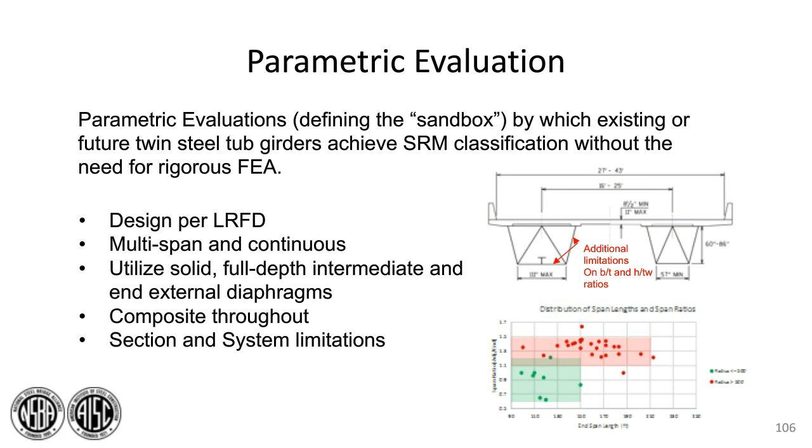So the bridge we did this for was in Green Bay. This bridge did not get evaluated using finite element analysis that was covered in detail earlier, but it had some sister structures that were.

So we developed these criteria to show that yes, this bridge fits within those limits of the other structures that had been shown to be redundant. And so we submitted that to FHWA.

They approved it. They liked the concept of developing something that doesn't rely on finite element, like a statewide policy that we could use to automatically classify structures as system redundant. But at this point it still remains a case-by-case evaluation. So our goal later is to get to a point where these bridges automatically become SRMs.

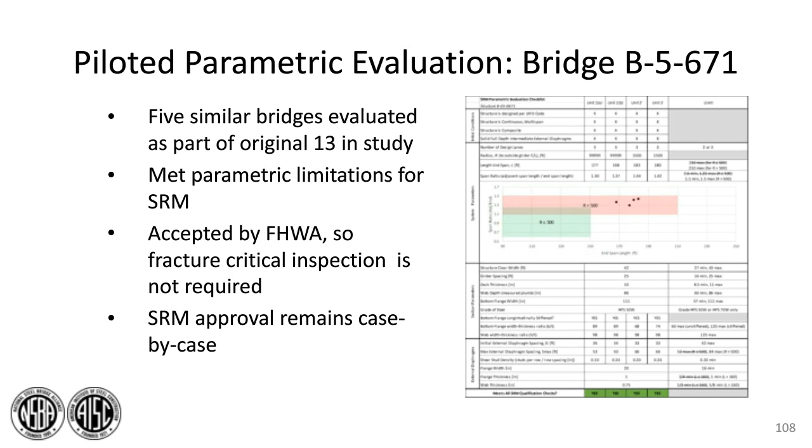So phase 2, this was the last phase as we evaluated our existing structures. As I mentioned, all these bridges had some kind of unique characteristic that was different than the rest we had looked at.

At this point, the AASHTO guide spec had been released. So the result was that of the 7 bridges we looked at, 3 of them were able to be reclassified as SRMs, and the remaining are still fracture critical.

And I'll point that out in the following slides, showing which ones made it and which ones didn't, really just to point out that analysis isn't going to guarantee that your structure will be considered system redundant, but it should help give you an idea of what kind of success you might find if you were to look at your existing structures, or identify ways that through retrofitting you might be able to achieve that.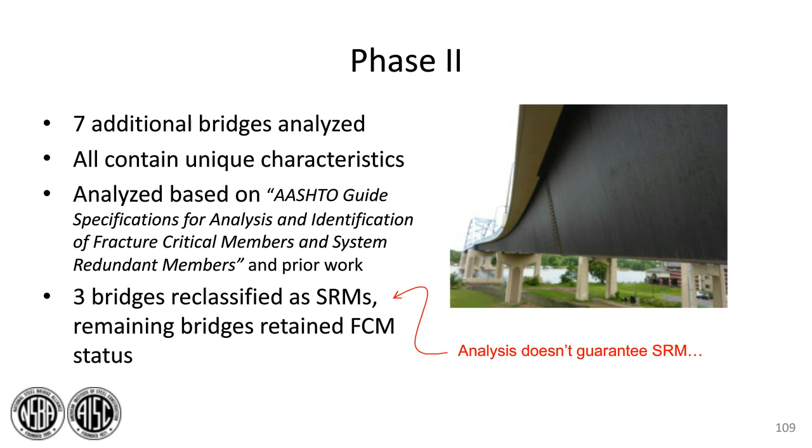So this first one, this is a fairly modern structure. What was unique about this one was the existence of that integral crosshead, just to provide clearance for the roadway below there. We had to shorten up the pier.

So in addition to doing the evaluation where you cut one of the main longitudinal girders, we also cut that diaphragm. And what I think saved us, ultimately this passed the evaluation, was that top flange and that crosshead—there were actually two of them bolted together.

So the assumption was that the web and one of those flanges, the one welded to the web, fractured, while that top one continued to transfer load. So this one successfully was reclassified as an SRM.

These two structures are sister structures. They were put through the evaluation method and also passed. I want to point out what's unique about these structures is that they don't have those full depth diaphragms.

And if you note in this cross section, they're not composite with the deck. So it's just to show that the existence of a full depth diaphragm that's composite helps considerably, but it isn't like a game changer—it's not something you have to have in every case.

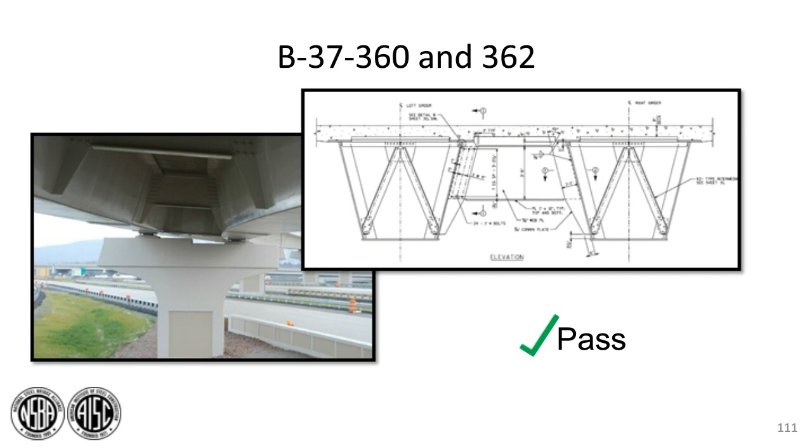Getting into some of the ones that didn't pass, the picture just kind of speaks ominously that it didn't work out well for us. This one was a straight tub girder with no shear studs over the piers, and the cross frames are just kind of wimpy angles. So when we passed it through the evaluation method, it didn't meet all the criteria and remains fracture critical, due to bottom flange buckling over the pier.

This one's also a fairly modern structure, over the Mississippi River, and you'll note there are no intermediate diaphragms in this structure. So this one also, when run through the evaluation process, didn't pass. Also bottom flange buckling over the pier.

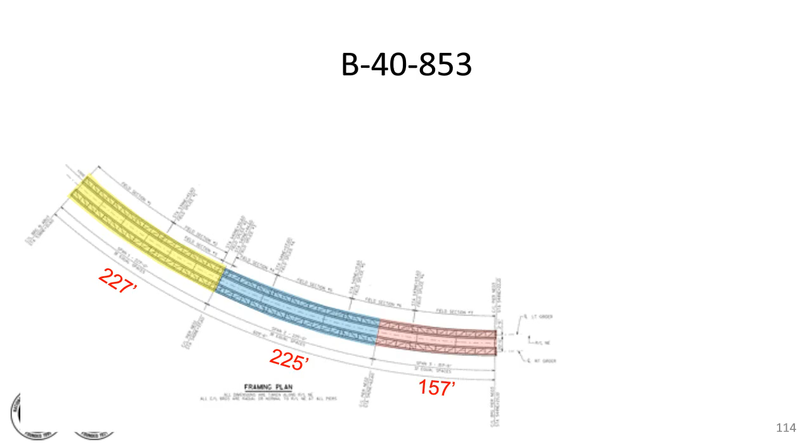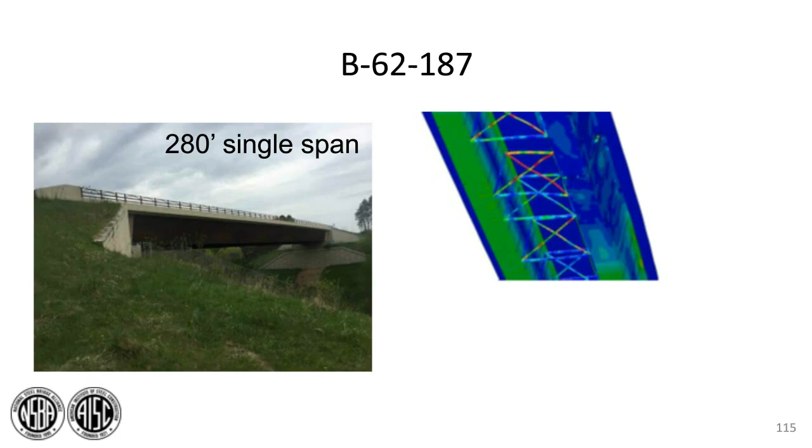And then lastly, we have a single long span structure in the state. This one also did not have solid diaphragms in the middle, and also didn't pass. So this one remains fracture critical. Now this one really had an issue with shear stud failure.

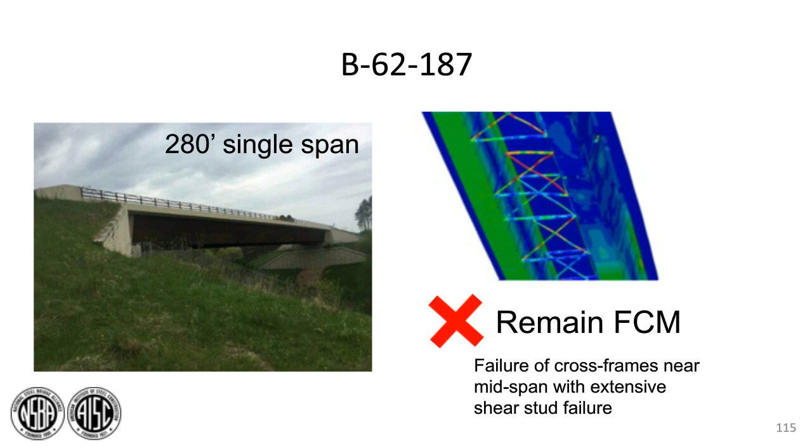So I want to circle back to key features found from the evaluation process that occurred in these tubs. Analysis demonstrated the benefit of relatively stiff external diaphragms, based simply on looking at which structures passed and which didn't. In addition, Purdue did an analysis of a representative bridge, evaluated with and without them, and found that without them you generally saw excessive shear stud failure.

So, next steps. We successfully removed 17 of our existing structures from the fracture critical list, which was a great benefit to us. Moving forward, knowing what causes some issues in our structures, we're looking at possible retrofits to address those structures deemed not sufficiently redundant. And one of our goals is to have a policy for new designs that would be automatically classified as SRMs.

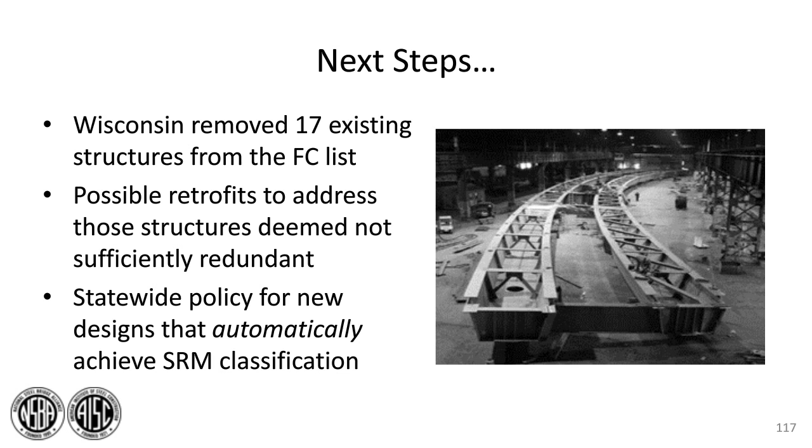As Dai mentioned earlier, Purdue has proposed a simplified approach for designing SRMs, intended to complement the AASHTO SRM guide spec that's out there. It could be used for both new and existing designs, and is subject to geometric limitations with some additional design details and checks. The key thing is that no FEA is required.

So some of those geometric limitations - these bridges would go through a screening process with certain checklist items. It has to be continuous and composite, and there'd be limits on parameters such as deck width, span length, skew, etc.

One interesting function found through this analysis was that the dead load deflection was a good indicator of whether the structure would pass the established criteria. So they put a limit on dead load deflection in the unfaulted state, to avoid classifying something that tended to be more flexible, which could result in significant inelastic behavior.

And the nice thing is that this dead load deflection can come out of typical engineering programs that we have, like MDX, CSI Bridge, something like that.

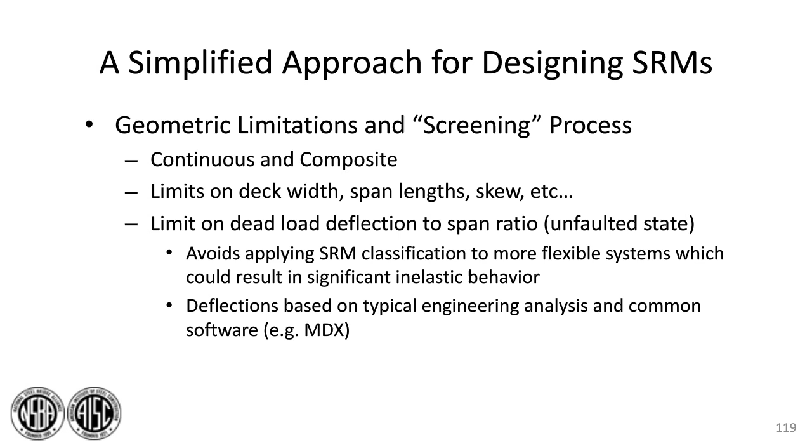Establishing certain design details, there'd be requirements on shear studs - the layout, the height - specifying details for the external diaphragms, and in addition a couple of basic design checks. The idea is that if you hold the structure to certain geometric limitations with some design details, you isolate the expected failure mode based on all the evaluations that have occurred already.

Some of the additional design checks would include checking the negative moment region near the flange transitions and establishing a minimum demand to capacity ratio. And also in the positive moment region, having a minimum DC ratio to avoid plastification of the intact girder in the faulted state.

So that's all I had. I'm going to pass it back to Dai for some closing remarks.

Thank you, Angie. Okay, can you hear me? I think my earphone may have a little bit of volume. Dai, we can hear you. Okay, that's good.

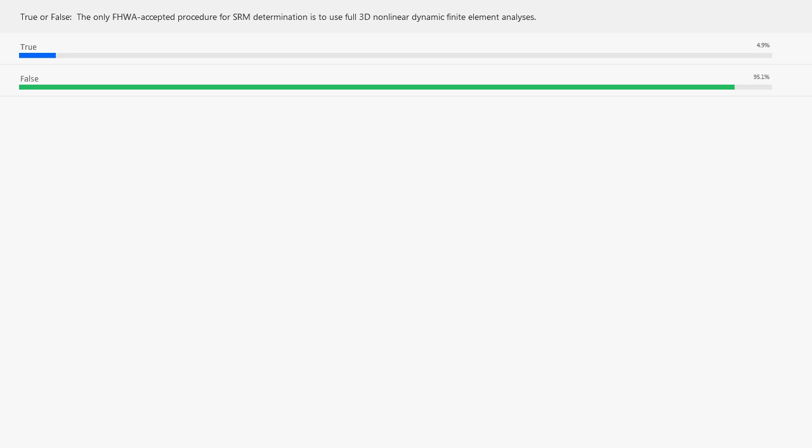Let's see if the next ones are any more difficult. The next question: when designing for the extreme event of member failure using the TxDOT design methodology, which type of analysis assumes the intact girder carries all of the self-weight of the span and the entire live load? Is that A, the approximate structural analysis, B, the refined structural analysis, C, both A and B, or D, neither A nor B?

Let's go ahead and go to the results for that one. Jamie, this was from your part of the presentation. It looks like about two-thirds of the audience thinks that the answer is A, approximate structural analysis. The second most popular answer was C, both A and B, at 22%. What were we looking for here? The correct answer is A, approximate structural analysis.

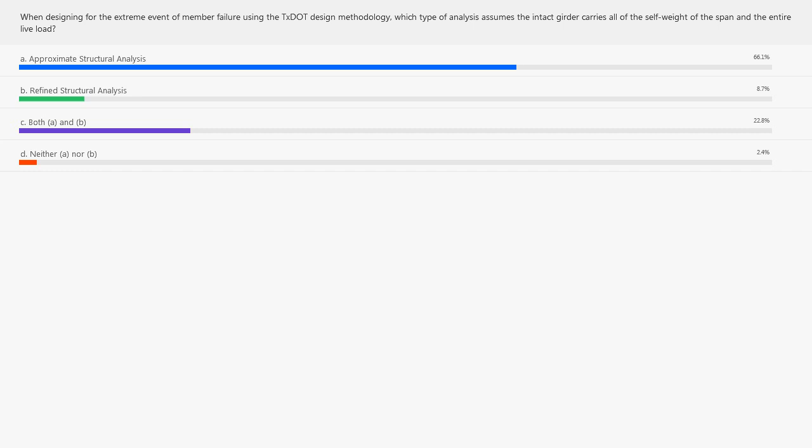Two for two so far, so let's go to the final one. What was the key feature highlighted in the system redundant bridges in Wisconsin? Is it A, three or more tub girders, B, external full depth plate diaphragms, or C, straight bridge?

Let's go to the final poll results. It looks like it's overwhelming, Andrew, that 96% think the answer is B. Did they get that one right? That is correct, yep. All right, good job, everyone.

So let's go ahead and get to some Q&A. We have some good questions that came in from the audience. Dai, I'm going to start with you. This is a question related to your final message. The presentation today focused on twin tub bridges and SRM classification achievement. Is there any information available at this time through FHWA or elsewhere for other more common bridge types that might be good candidates? The question asker says it is understood that each agency would need to do an analysis anyway, but some additional guidance might be useful.

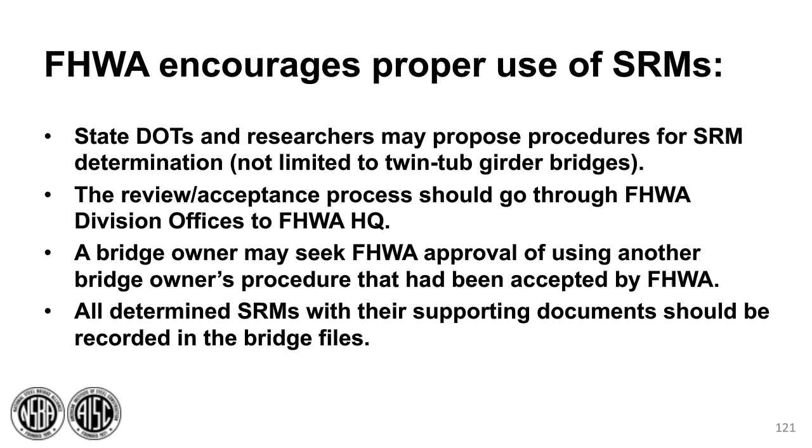Thank you, Dai. Let's go back. Let's look at slide 55 for this next question, and this question's for Jamie. Do the intermediate steel diaphragms have to be full depth in TxDOT design processes?

Thank you, Nate. The answer is the diaphragms should be as deep as practicable, but at a minimum they should be at least 0.75 times the tub girder depth, and that's actually in our bridge design manual, so you can find that there.

Sticking with you, Jamie, let's look at slide 81. The question is, how long do you expect it to take TxDOT to demonstrate to FHWA that all existing twin tub girder bridges in their inventory are SRM and do not require fracture critical inspections?

That's a good question. First of all, like Andrew said, just because we run analysis doesn't mean we'll be able to demonstrate that they're SRM. I'm sure there'll be some that'll still be fracture critical. But we're currently working on a prototype for the refined analysis.

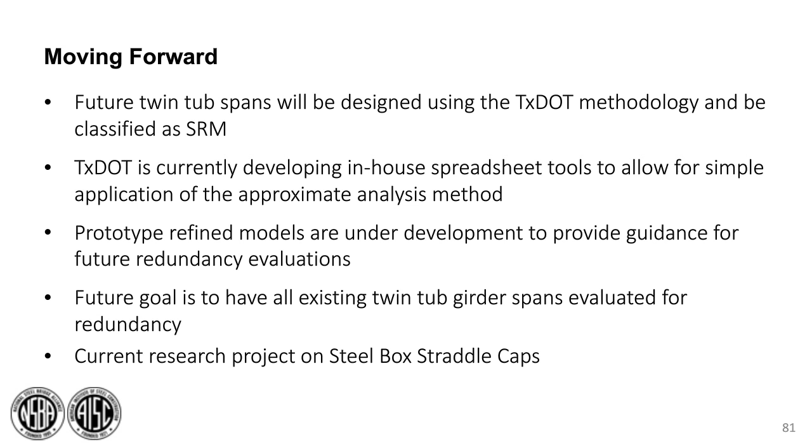Thank you. Let's move to slide 112 for the next question, in Andrew's part of the presentation. For these examples starting at slide 112 of bridges that you weren't able to qualify as SRM, have you considered doing retrofits to make them SRM? It appears that some simple things might be done to get them within that group.

So like I said, our focus right now is establishing our criteria for design moving forward, but definitely coming back to some of these other bridges is something that's on our radar.

Here's a question also posed to your part. I'm going to go back to slide 89, where you're talking about the cost. The question is, in general for these in-service structures with FCMs, have you figured out a point at which the cost of performing analyses showing there are SRMs might outweigh the cost of doing the biennial inspections?

That's a detailed question, so I'll ask Andrew if he has any feel for that. I won't throw out specific figures, but it was definitely in our interest to have these evaluated. The great thing is it just keeps paying back, every 2 years that's a savings. It was definitely worth it—we had 17 structures that went through this process, or about 16 where we did a parametric evaluation. It was definitely worth it.